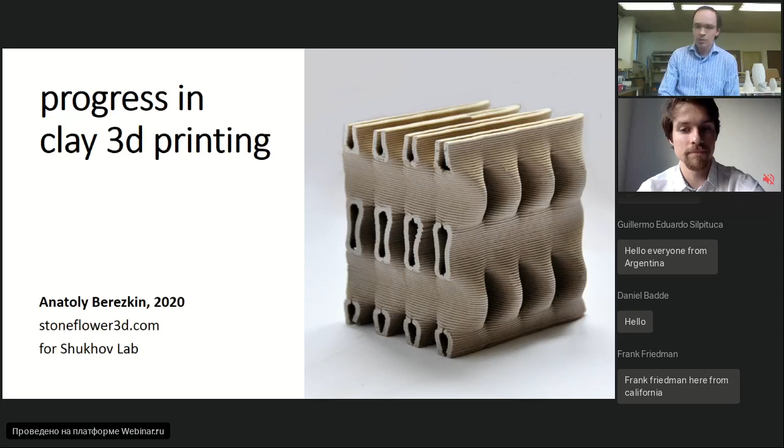First of all, I would like to mention that in my opinion, clay 3D printing is very closely related to construction 3D printing with concrete. We use nearly the same equipment, very similar nozzles, pumping devices, generally routing equipment, so maybe it makes sense to combine them in some sense and consider related equipment together.

So I will skip my introduction and just start with an overview of automated routers which could be used for deposition of clay or concrete.

The first such device was invented and proposed in 1938 by Willard Pollard in the United States, who proposed a position controlling apparatus with 5 degrees of freedom. It's kind of a predecessor of the CNC router or robotic arm. Unfortunately, it was never built, but it was patented, and many engineers were inspired by this idea.

In the end of the 40s and beginning of the 50s, the United States was investing a lot of effort into the development of new aircraft and helicopters, and many companies were contributing, working on orders from the government. One of those companies invented and built the first numerically controlled machines.

Then development of those machines gradually migrated to MIT, and industrial production of such devices began. There were even no computers on the market at the time, but those machines were programmed with tapes and holes on those paper tapes.

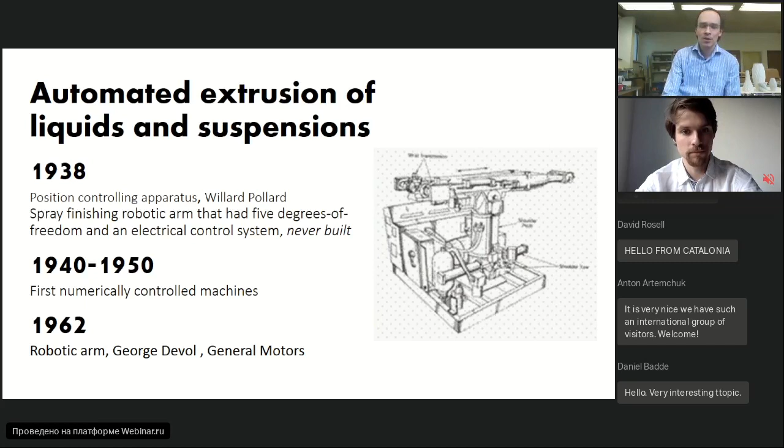In 1962, the first robotic arm was built by George Devol for General Motors, also in the United States. So it's a little bit all about the United States, I'm sorry.

In the 80s and 90s, automated robotics was already available for industrial use. For example, Japanese companies like Shimizu and Hitachi built their big office skyscrapers in Tokyo using automated robotic arms for slip casting, automated assembly, automated welding, and all such processes. It was not concrete 3D printing or contour crafting yet, but all those technologies were already available at the time.

I'm sorry to interrupt you, Anatoly. Maybe we can try switching off your video so we only have your sound, because the connection is skipping a little. Okay, now it's better. Hello, do you hear me? Okay, great, yes, we do hear you well.

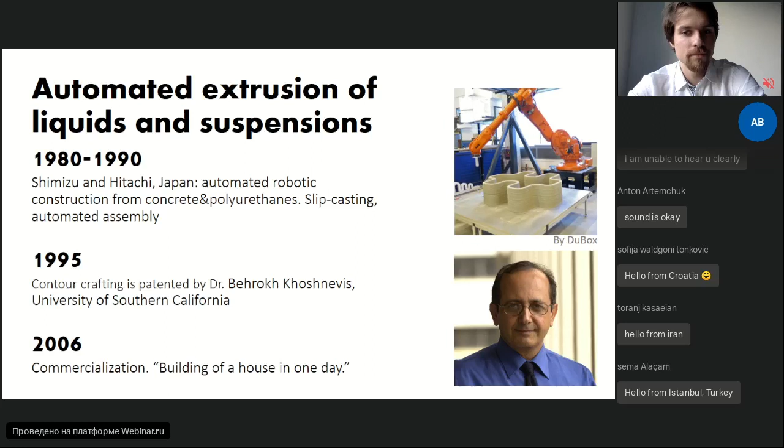But all those devices which I was talking about were mainly for industrial use. Very big companies were producing and using them, and prices for all equipment were very, very high. On the other hand, many people were already informed about the possibility of additive manufacturing, and they were interested to try this technology at home or in their small business.

This probably led to the appearance of the RepRap project, founded by Adrian Bowyer at the University of Bath in England. His initial idea was pretty academic: that we can build a magnificent device which can reproduce itself, so you can print a printer for yourself, then print one for your friend, and in that way those printers can populate the world.

And of course, many components of modern 3D printers are non-printable, but generally this project became a huge source of different affordable technologies of additive manufacturing, and it had a huge impact on the whole industry.

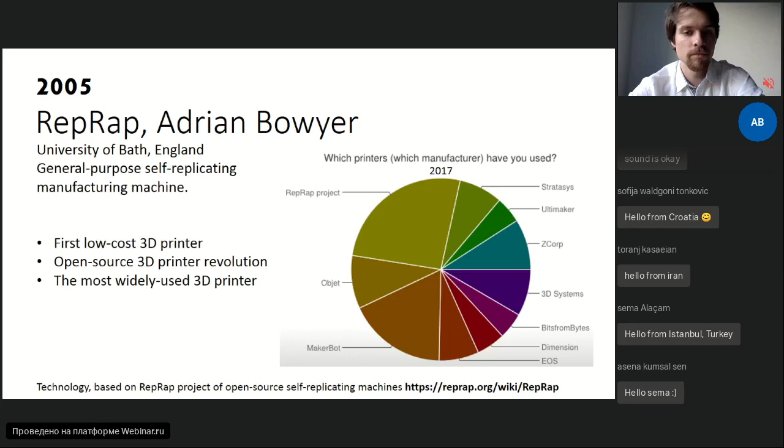Among many other technologies developed in the frame of this RepRap project, one technology was extrusion of pastes and viscous liquids using small medical syringes. This technology was the first applied for ceramic 3D printing at desktop scale by this person.

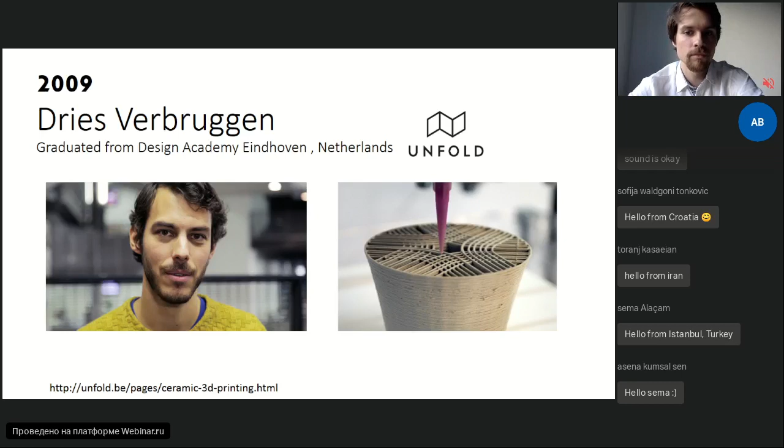This is Dries Verbruggen from the Netherlands. He has the studio Unfold in Antwerp, and he was an artist and designer graduated from the Design Academy of Eindhoven. He made a huge contribution to the nowadays development of clay printing equipment. I just want to show you the list of his achievements which he made in 2009.

It was the very first open source ceramic 3D printer. He used a volumetric extruder with a syringe. He also tried to use an air-driven extruder. He tried to combine a motorized printhead and an external source of clay to improve quality of deposition and better control over the clay flow. And he even tried three different types of Moineau extruders.

I should say that the Moineau extruder, even nowadays, is kind of a unicorn technology. Everybody knows about it. Any maker dreams of building a Moineau extruder because it's very efficient, precise, and simple in use, but nearly no one is really using it, and it's very difficult to build, in fact.

And this person made use of it before any forums and any information available on the internet about building 3D printers for clay. He is driven by ideas of open source, making your own things instead of buying them from IKEA, and he was going to transform pottery in the digital era. Actually, he did.

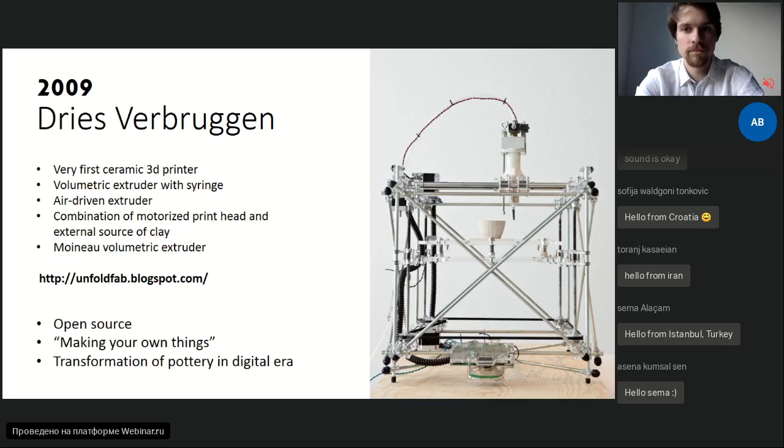Another important person in the evolution of clay 3D printing is Jonathan Keep, also an artist from London College of Art. In the year 2000, he was introduced to computer 3D modeling instruments and started to learn how to use the software to create new shapes and structures. He was very impressed by the opportunities to do so on the computer - how easy it was, and how many forms you can produce and program.

Somewhere in the year 2010, he started to search for opportunities to print his ideas and make them real. He immediately found Dries Verbruggen on the internet, and they started collaboration. You can find a very good interview on YouTube with Jonathan Keep following this link.

And here is the third person who inspired many people to start printing clay while they had never done this before. This is Olivier van Herpt. He is also an artist and designer from the Design Academy of Eindhoven, actually from the same place as Dries Verbruggen.

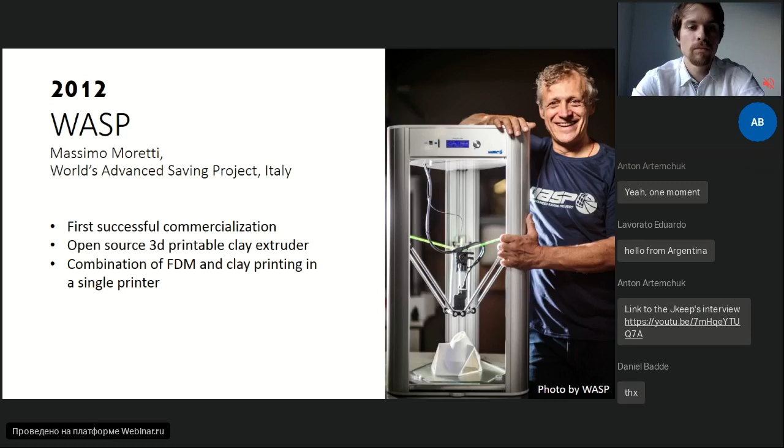After the first commercial success of such printer, many other companies started to appear around the globe. This was Lutum in Netherlands, Potterbot in the United States, and Gaia Tools in Poland. Unfortunately, Gaia Tools nowadays doesn't appear on the radar, so it seems like they stopped doing anything. But other companies exist and produce the printers.

All those printers were for commercial use. They were relatively big printers, pretty advanced, and prices were relatively high. So those printers were available for universities, art colleges, or small businesses, but not for individuals.

In the year 2014, Jonathan Keep decided to create a group called Make Your Own Ceramic 3D Printer. This group was very conveniently placed in the Google Plus groups, with a very good forum, a very good platform for communication and exchange of ideas.

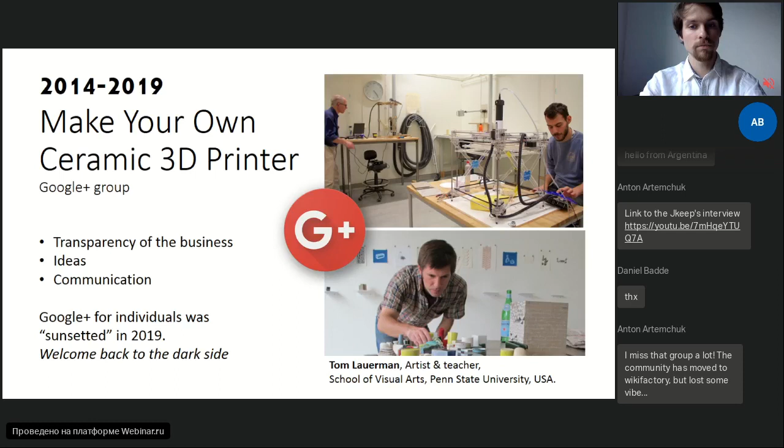But this group didn't disappear. Thanks to our great administrators, they took care of this huge amount of information which was collected, and all this information was migrated to the Wikifactory. It's a modern alternative to Google Plus groups.

You can find this group nowadays here, and you can find me there as well, unavoidably. And at the golden age of this Google Plus group, there were over 3,000 members.

According to surveys made by Tom Lauerman, there were like 30% of people from Europe, 30% from North America, 50% of members were artists and designers, 40% engineers, and about 10% others. So to me, it was quite surprising how many people with an engineering background were there.

And we were very efficiently discussing different engineering solutions.

Since the group was rapidly growing and engineering solutions became more and more affordable and efficient, at a certain point it became clear that on the market of consumer 3D printers there is a huge gap. We have big printers for industry, but we don't have small printers for individuals. And many people decided to start the business.

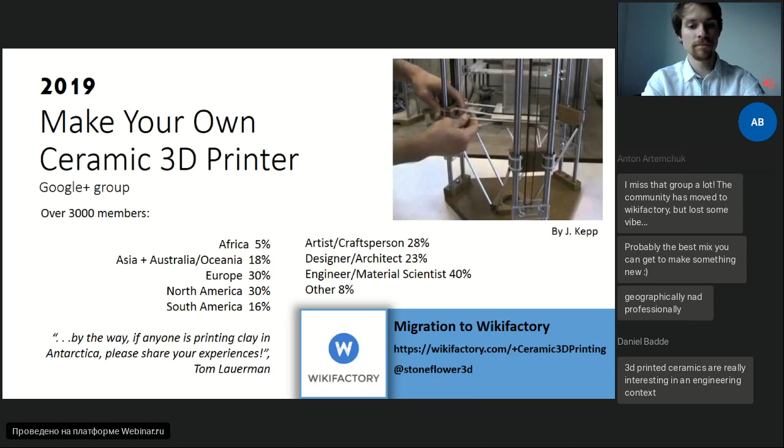And we got the second wave of commercialization. It's an era of Kickstarters, I would say. This started in the year 2017 with the first clay printing startup, Clay XYZ.

This startup somehow failed because they didn't deliver anything to backers, but they were a good example of how you can launch the business on Kickstarter, how you can advertise it, how you can present it to customers, how to communicate with them. And this was actually very, very useful, I guess, for all people who tried to do projects on Kickstarter later.

Unfortunately, nowadays Kickstarter is kind of an art of impossible because prices are getting low. The reason for this is that Kickstarter made life for founders quite secure. They may not return money to backers and nothing very dangerous will happen to them. On the other hand, customers tend to reduce their risks by putting money into less expensive devices.

This all caused a significant drop in the prices of goods delivered through Kickstarter, and unfortunately it makes investments there more and more risky. Nowadays, people mainly use Kickstarter for marketing, but you can hardly earn any money there. That's my opinion.

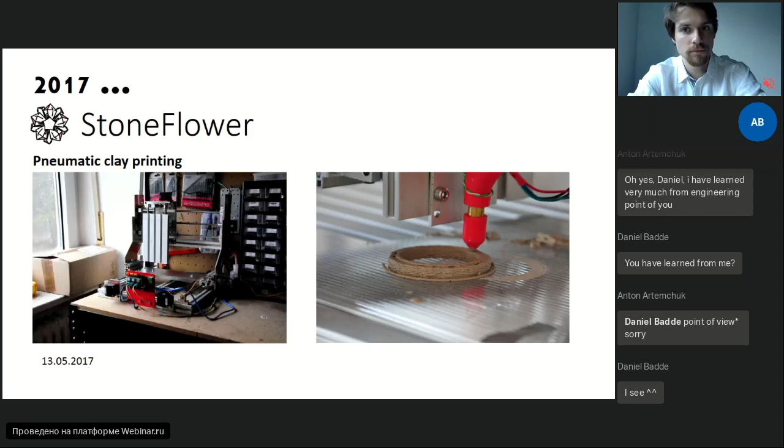Then, quite rapidly, I built a 3D printer of industrial scale, which was pretty advanced at that moment because it has an all metal aluminum frame, 32-bit electronics, and it was powered with compressed air. I was able to print such vases.

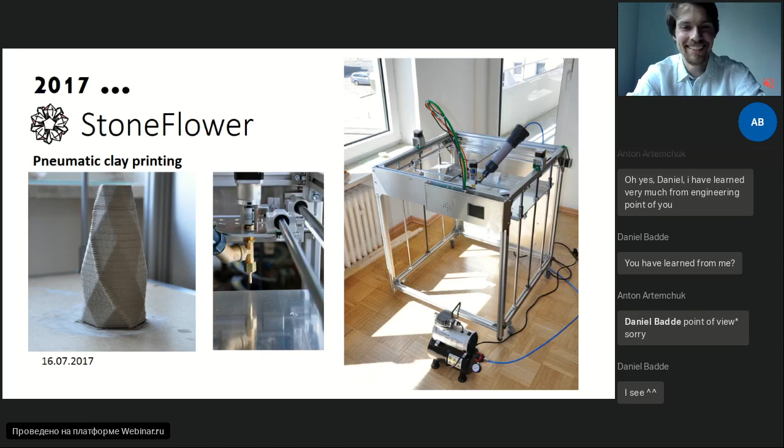But then I had a couple of accidents, some quite dangerous. I exploded a couple of barrels with clay, and I decided that since my printer is not going to be for military applications, I'm not brave enough to kill my customers, and maybe it's better to switch to mechanical RAM. At that moment, it was my luck that Jonathan Keep posted his portable mechanical RAM extruder, and I made not a clone or copy, but was inspired by this idea and made my own mechanical RAM.

Yes, and you can see the spot of clay on the ceiling from those accidents. It was really quite dangerous when 1 kilogram of clay flies around your head. At the speed of sound, it's not that great.

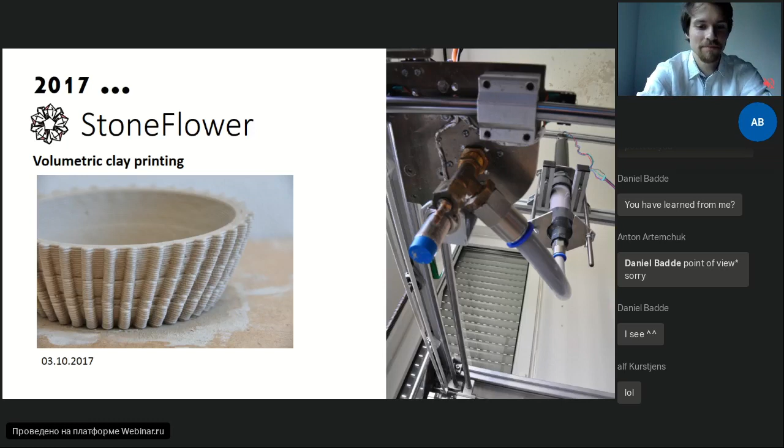By the end of the year 2017, I was already able to make such nice prints shown here, and had a commercial version of the RAM extruder and a commercial version of the printhead.

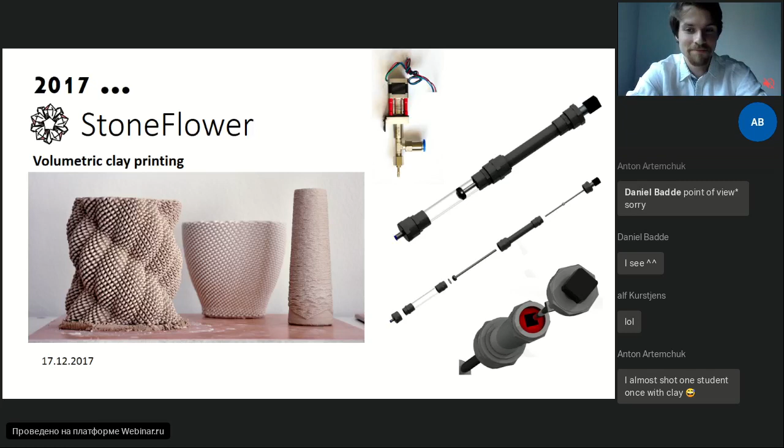The year 2018, I started with Kickstarter in February. In August, I had already developed a RAM extruder for 1.5 liters of clay, and my kit was able to print not just ceramics but also deposit different paints and pastes on a flat surface. This blue image here is actually also painted with the ceramic 3D printing kit.

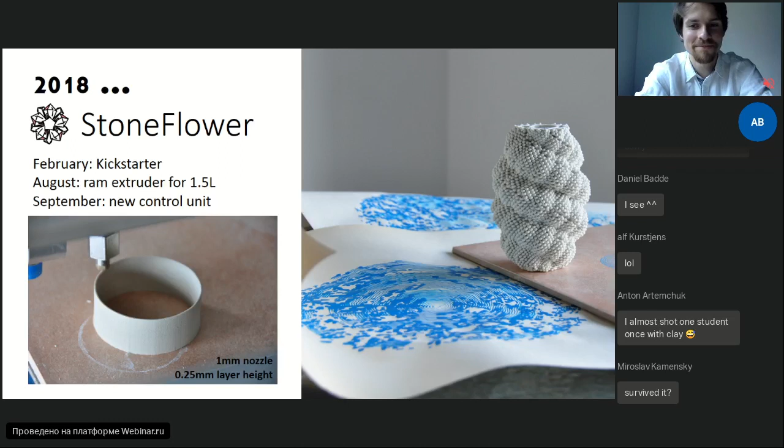In September, I designed a new control unit, which made it possible to connect the kit to nearly any desktop 3D printer. At that moment, the available quality of printing was 0.25 millimeters, so a quarter of a millimeter. It's comparable to the quality of FDM printing with polymers. Not so bad.

In the year 2019, the main product became a clay 3D printer, which was already quite notably improved, polished, and production of this printer was nearly optimized.

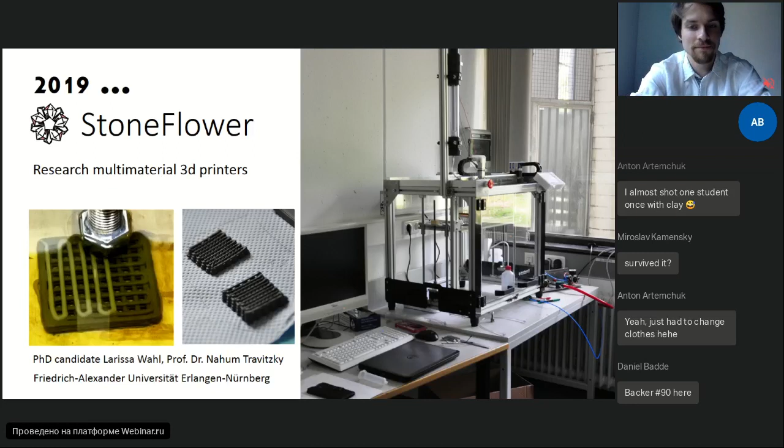And the main product is this printer of larger scale. It's 50 by 50 by 50 centimeters printing volume.

You may see how the printhead, for example, had evolved during 6 months of the year 2019, from this very basic construction with a 3D printed metal auger screw, up to a pretty elaborate construction with a screw from stainless steel and an auger extruder CNC milled from aluminum.

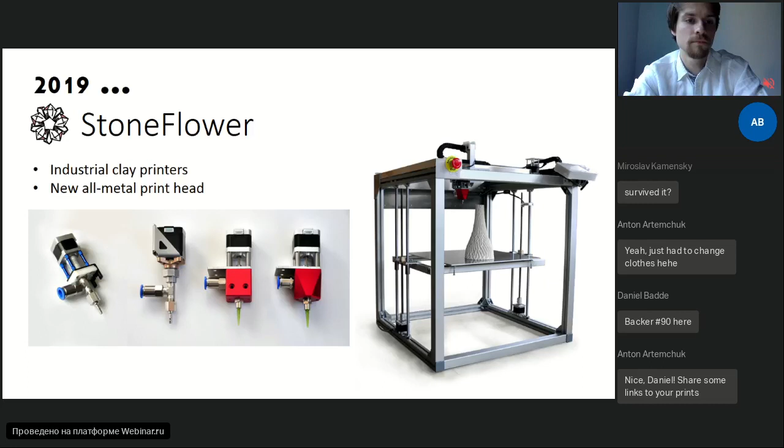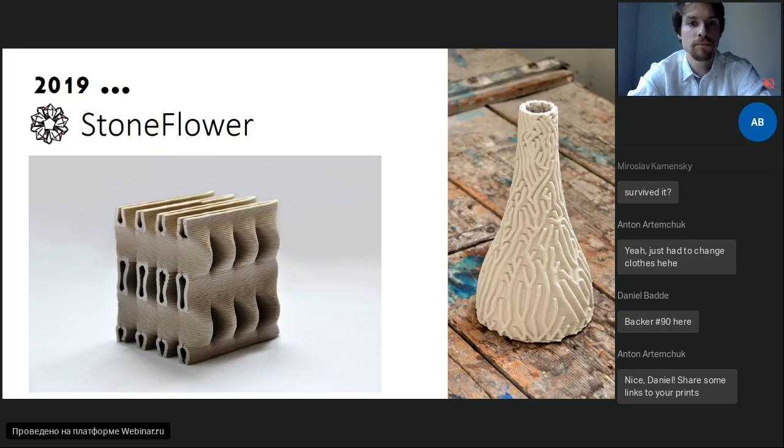And this printer gives you already this quality of printing, which I'm quite happy about. Okay, this was a short advertisement, and now I wish to go to the end of my talk and discuss a little bit the perspectives of clay 3D printing.

I'm not really sure that the main application is going to be something like printing houses on Earth from Earth, on the Moon from Moon, and on Mars from Mars. I guess there are many possible applications for clay 3D printing.

And first of them, and I don't know if it's the most important or not, it's materials. We have many materials which are pastes, suspensions, or highly viscous liquids which can be printed. But we don't have many among them which are specially designed for use in 3D printers, and this is kind of a gap which can be rapidly filled in the future.

Second option among use of new materials is two-component polymers, polyurethanes, epoxy resins. They can be used in 3D printing with extrusion much more than they are used nowadays.

Also, we can combine certain target and sacrificial components. For example, here on the image you see this combination of aluminum oxide, which forms ceramic upon burning, and a sacrificial component, calcium carbonate, which serves as a support structure. The calcium carbonate will be removed upon burning and can be dissolved in water. So you can print quite sophisticated structures which will withstand gravity using just two components.

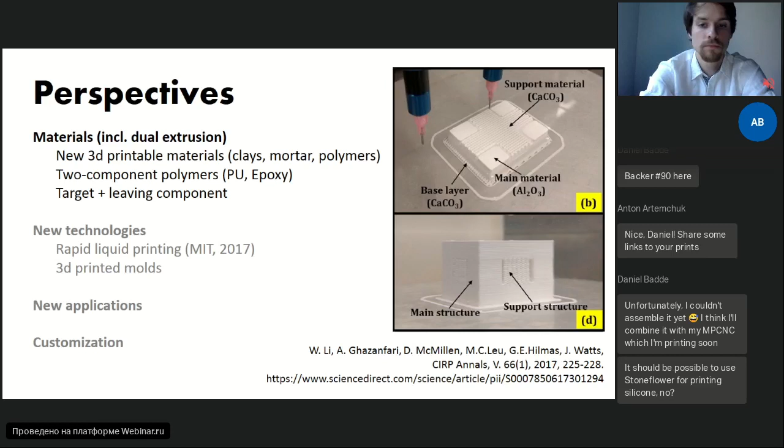Next direction of interesting applications are new technologies. They are not so easy to predict because all of them require some engineering creativity, so we may see only part of the possible future opportunities.

This is one example. Another example could be rapid liquid printing of concrete, which I made. You can watch the video on YouTube following this link, or read the defensive publication in Hackaday, which we made.

The idea is the following: you can use the clay mold as a viscous scaffold, and inside this container with clay, you can extrude the concrete or mortar. Initially it is liquid and just hangs in the surrounding clay, and it gradually cures with time. So after 3 days you just get a solid structure from concrete embedded in clay, which you can remove.

Anatoly, maybe we can try putting your camera back so we can see a little bit more of you. A little bit more of me, okay, where I am. I cannot find me, I'll try switching you on. No, there's, I don't know. Dear visitors and listeners, do you have any questions for Anatoly? Oh yeah, here he is. Actually, if you're planning to build something, I think it's the best opportunity to ask something technical from Anatoly because he's very experienced in building machines. Also check out the last video, the YouTube link on the rapid liquid printing of concrete inside of another liquid. Do you see the questions, Anatoly? It's in the chat section. Okay I see questions, so maybe I have to start from the start.

We didn't have many questions actually. There is one question from Daniel Badde: what's the biggest size a ceramic printer could be built? Well, it's not limited by the possibility to build the printer itself, it's limited by the possibility to print something big.

It depends. If you print from pure clay, as far as I know, the tallest prints are about 1 meter or 80 centimeters. For this you will need really diluted clay, natural clay of throwing viscosity, and print with a quite big nozzle, about 8 millimeters.

I would add that it's mostly limited by the size of the kiln you're using, because most of the time you are planning to fire the piece after you print it, unless you're printing with adobe, which is a rare situation. So it's almost possible to build any size of machine, because concrete printers can go up to building size. So you could stuff some clay inside. Well, I hope we answered this question.

Yes, then I see the question about consistency of the clay. I can insert some coins about that, or maybe you can start first. In my first experiments, my idea was that you need quite diluted clay which can still keep shape against the gravity force, so when you mix it and try to form by hand some structure, it should not collapse. But technology improves, of course, and you can print more and more hard clay nowadays.

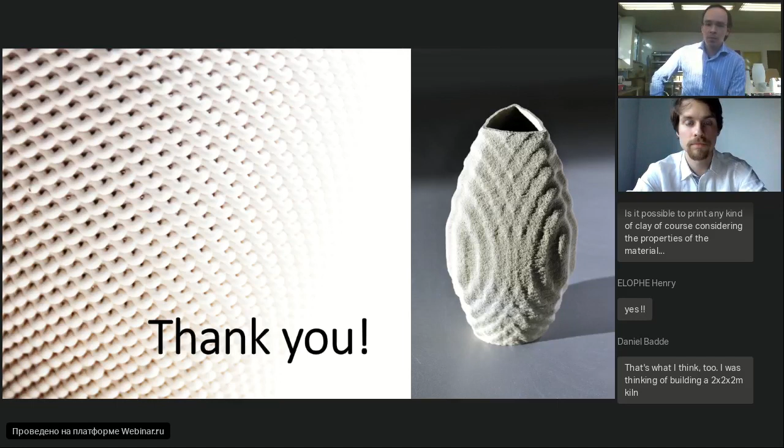For example, in my presentation I showed Gabriel, who printed with clay using nearly non-diluted clay with about 25% water by weight. So if you are searching for a good concentration, I would recommend taking the clay from the bag, which has about 20 to 25% water, and adding another 15% of water to start with this. Then gradually you could increase the viscosity more and more, adding less and less water. I would say 24% moisture by weight is a good starting point, it's an average.

In many clays that are available in Russia, both white clays, stoneware clays, and red earthenware clays. Also, the interesting thing, if you start adding some non-clay particles like chamotte fillers, it actually makes the mass less viscous, which means it's easier to move it in the hose. I was really surprised by this knowledge when I first learned it, but basically adding very fine sand into the clay makes it easier to move in the tube. Also, you can make it less moist if you add more non-clay particles to it.

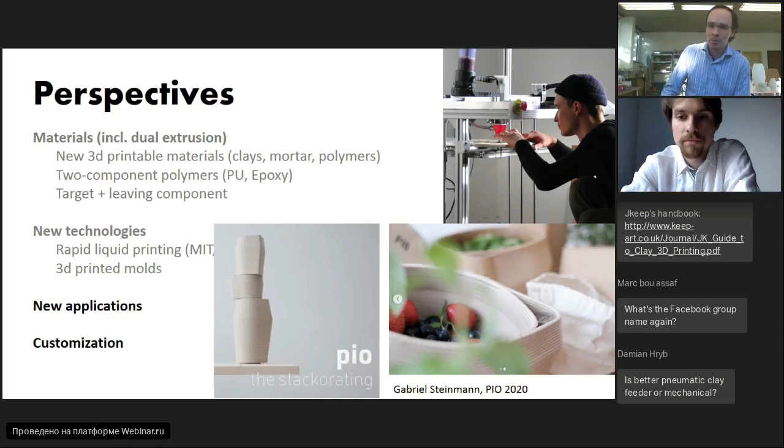One comment though — it's very important to take care, so as always, safety first. The problem with air is that when a container breaks, the parts of it just explode, and compressed air pushes them. It's not the same with a mechanical ram — with a non-compressible liquid, if you get a crack on the ram, you'll just have a very small leak of clay and nothing more. But if your pressurized container has a crack, it will explode. You should understand that if you take plastic components and add connectors on your own, probably in the holes you drill, you create additional stress, and this may facilitate explosion.

And if you are planning to build something from scratch, usually you have to use something between 4 and 6 bars to press the clay. If you're planning to make a cartridge yourself, take a tube which is rated for at least 10-12 bars, so it has some additional strength.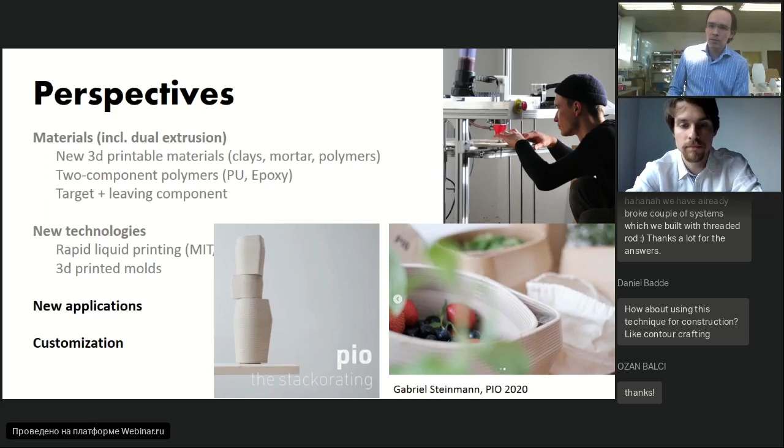Yes, I do — as I've shown, I use it for rapid liquid printing. Some people are using our printers for printing concrete for research purposes, for example the Technical University in Dresden.

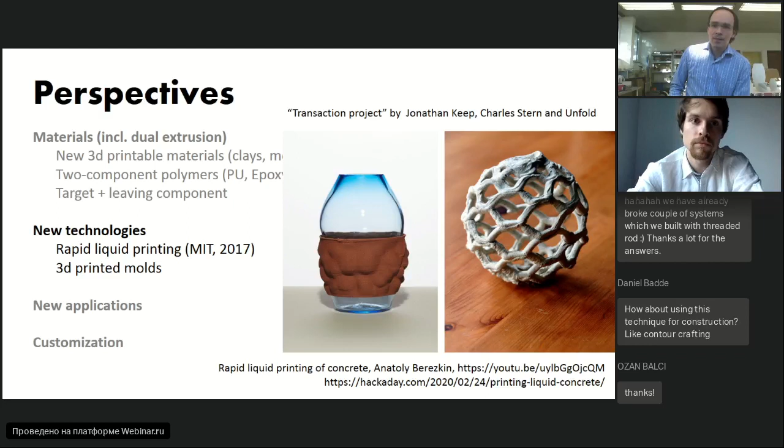You can use a RAM extruder, but you have to prepare your concrete in a specific way. The problem with concrete is that it contains particles of very different sizes, and they all tend to sediment, moving down under the gravity force. But sedimentation of different particles happens at different rates, and as a result, after a certain time without mixing, you get a gradient of density in your container. Most particles settle at the bottom, and more water rises to the top. To prevent this, in normal concrete you have to add stabilizers of viscosity.

I use bentonite, which is also recommended for 3D printable clay compositions. Jonathan Keep, for example, recommends this in his recent research on 3D printed clays, suggesting about 5% by weight of bentonite. I totally agree with him, so I use nearly the same concentration, and this makes concrete much more printable.

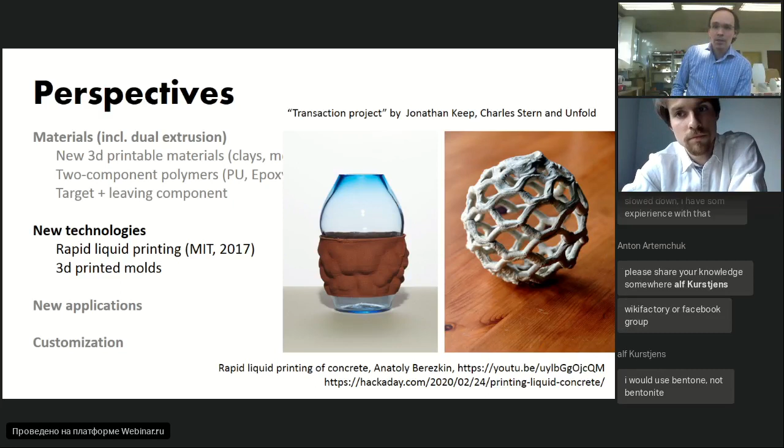You can use a barrel, which doesn't mix the clay, if you want to make it on a larger scale. Now there are available, for example, pressurized containers for 5 liters of material with an embedded mixer which is pneumatically driven. You can find them on Alibaba and buy them from China. That's an option for concrete.

I guess it's a good option. I've never tried it myself, it's quite an expensive experiment, about 500 euro per device. But it looks like a good opportunity to print concrete.

Okay, thank you. The next question we have is about fillers. What do you think about using smaller particles, fibers, and additives to achieve better structural performance?